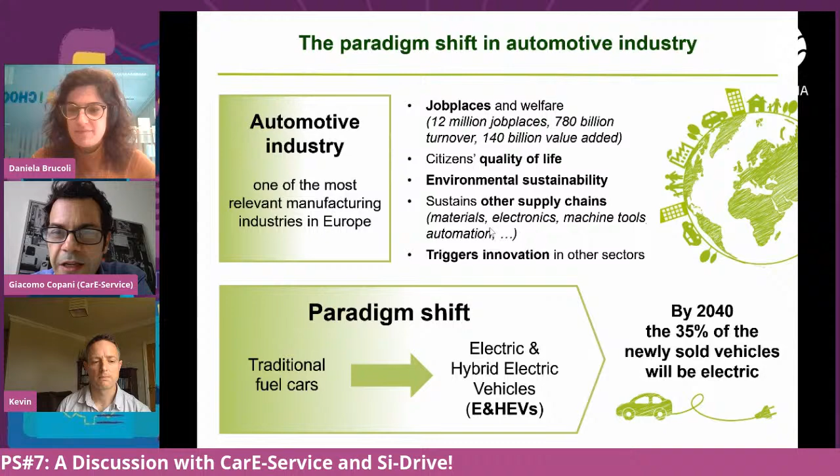So what is the point of CarE-Service? The point is the paradigm shift from traditional cars to electric mobility. We all know the projections. We all know that in 2040, more than 35%, now the estimations changed, will be the share of electric vehicles, but there are problems and opportunities linked to this transition. Here we are picking up some of the points that we address in the project. First of all, electric vehicles still have a high total cost of ownership, mainly due to the batteries.

So in CarE-Service, we are somehow addressing the 3 points. Obviously, the main one is the end of life, but thanks to circular economy, we also can improve users' experience and reduce total cost of ownership of electric vehicles. This is the project philosophy. So let's start digging into the topic.

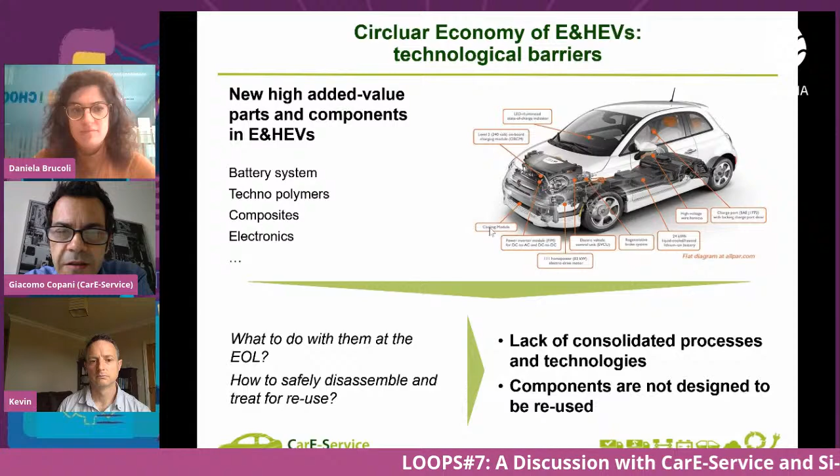Why this situation? Why are we not prepared for the end-of-life management of electric vehicles? Because they are basically a new product. They are new vehicles. And not all their components were designed for reuse, remanufacturing, or recycling. So really, there is a lack of knowledge, there is a lack of consolidated processes and technologies to reuse, recycle, and remanufacture parts of electric vehicles. And also, as I already mentioned, the design issue is quite relevant. Components are not designed to be reused, or they are not always designed in a structured way to be reused.

That's the point. So, in CarE-Service, we have the idea to work on the one hand on new technologies and business models to enable the growth of reuse value chains. And on the other hand, we have the idea to innovate mobility services based on the new reuse value chains. The two aspects are interconnected into a new ecosystem of mobility products, producers and users.

About the technologies, what are the main points of our project? We are working on the redesign for circular economy. We are working on the technologies per se, so technologies for disassembly, technology for remanufacturing, technologies for recycling, because in Europe we have a leadership in production technology, so we could, let me say, easily gain the same leadership in circular economy technologies. We are working on the business models to reduce the total cost of ownership of electric vehicles, as well as to enable new reverse logistics chains and new reuse chains.

From the mobility service point of view, the idea is to push new sharing integrated services thanks to the benefits that can be provided by circular economy. We are also working transversally on the regulatory framework, because we know that regulation is one of the major challenges for circular economy. So our project is also transferring guidelines and opinions to the policymakers as a European project. This is the underlying scheme that we are following in the project, and I would like to drive you through this.

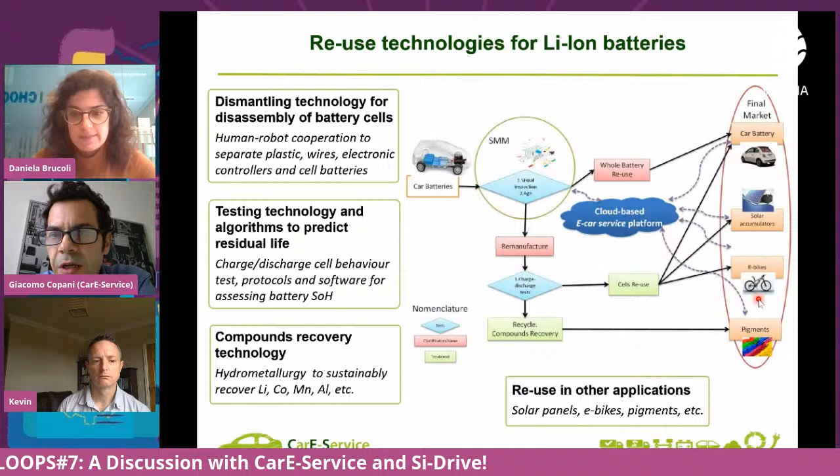And we are also working on the application side. In particular, we have demonstration scenarios in the energy sector, solar panels, automotive, chemical, but also in the medical field. I will tell you something later on. This is on the battery side.

What are we doing for the metals? For the metals, we are working on technologies for reforming metals and for disassembly of structural parts of metals. Reforming means taking a metal sheet which is used and giving it a new shape for a second use, more or less. Okay. So imagine that in the future, it can be technically possible to extract a roof of an old car and, for example, remanufacture a hood for a new car or as a spare, which gives a lot of flexibility.

The problem of structural parts, which are the red ones you can see now here, is that at the moment they are soldered, so it is not possible to extract modular parts in order to rebuild new structural parts for new cars. So what we are doing is to develop new desoldering methods and new modular joining techniques in order to modularly reuse these parts to make new components for new cars or fleets, new cars produced by OEMs, or spares.

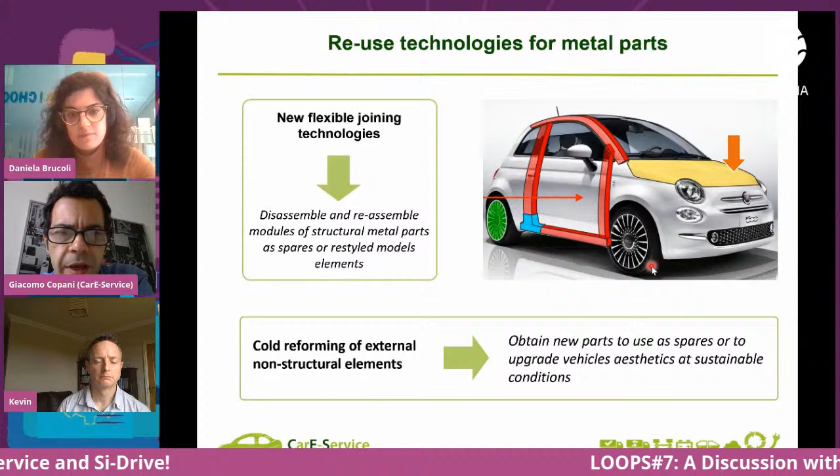For the technopolymers, we are working at the materials recycling level. So the idea is to select some valuable technopolymeric parts of cars and develop new compounds in order to reuse the material that we can extract from that, to be reused in new automotive parts as well as in new polymeric parts for other applications. So we are here talking about separation of metal and non-metal parts, grinding, formulation of new compounds, extrusion, and testing.

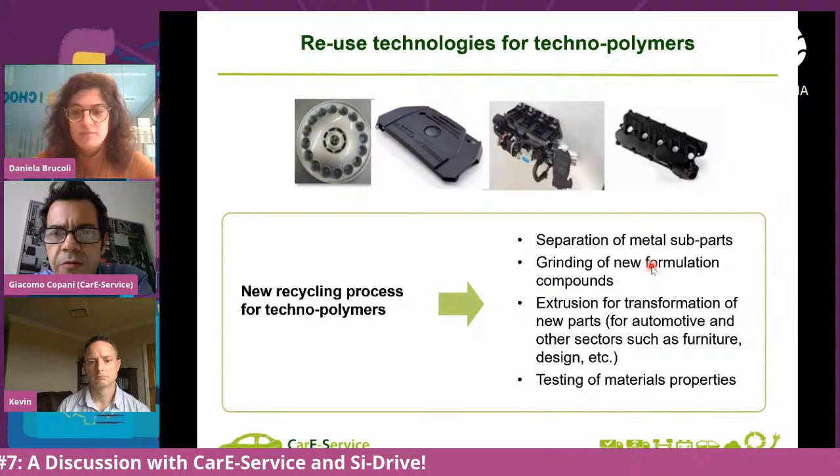Another very important part of our project is that we will enable the business of the reuse value chain through an ICT platform. Very important. This ICT platform will build a sort of orchestrated place where all the actors of the reuse chain can cooperate, but will also serve as a marketplace for the professional exchange of reusable parts. Reusable means remanufactured, recycled, and so on. So the platform is a trusted environment where you can find tested and certified parts.

You can put your needs, and then the supply chain activates based on the available volumes of cars and intermediate parts to provide what is needed. So in a certain sense, it's market pull. Another important thing is that the platform is linked with the mobile modules, because the parts that are certified locally by the mobile module will be made available immediately inside the ICT platform, and also the disassembly operation will be visible in the platform. The users can book the services of the module as a service of the platform per se.

Finally, about mobility services, we are designing with our partner car sharing services which are performance oriented, which are a little bit innovative in car sharing. For example, we are thinking about car sharing in rural areas, integration of urban and non-urban car sharing, integration of usage among companies and citizens, this type of things.

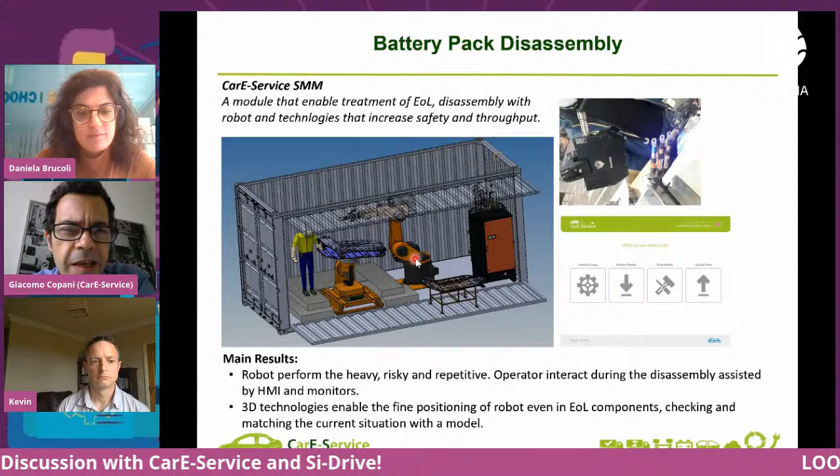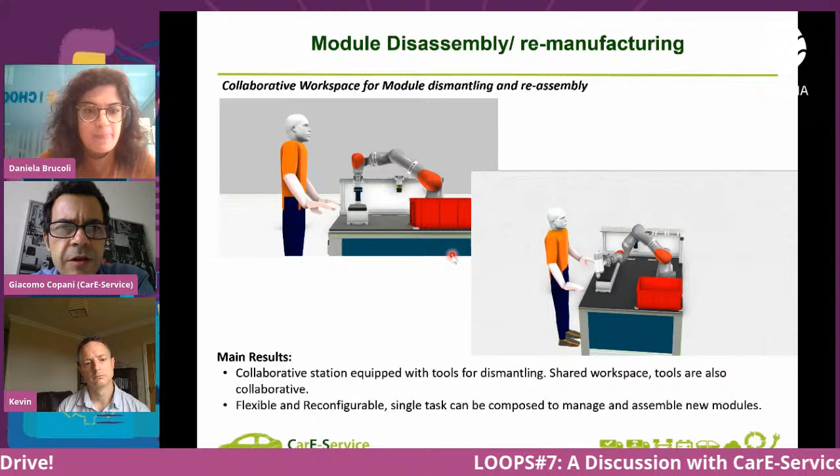A few words about the mobile disassembly system for battery packs. This is what will be included inside the truck: a robot for the disassembly of modules from battery packs in a cooperative environment, very efficient, and especially in a safe environment. For the disassembly of battery cells from modules, we are developing collaborative solutions. You see man-machine interaction, because here the operations are on a smaller scale, and still the goal is to guarantee safety, ergonomics, as well as efficiency of this operation.

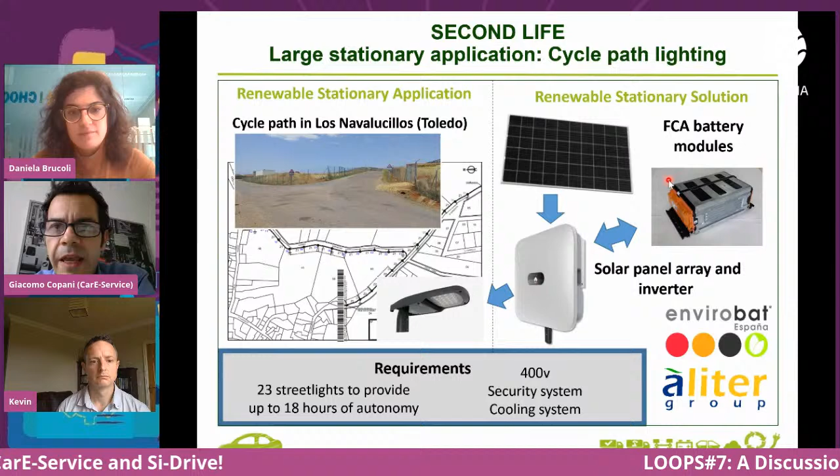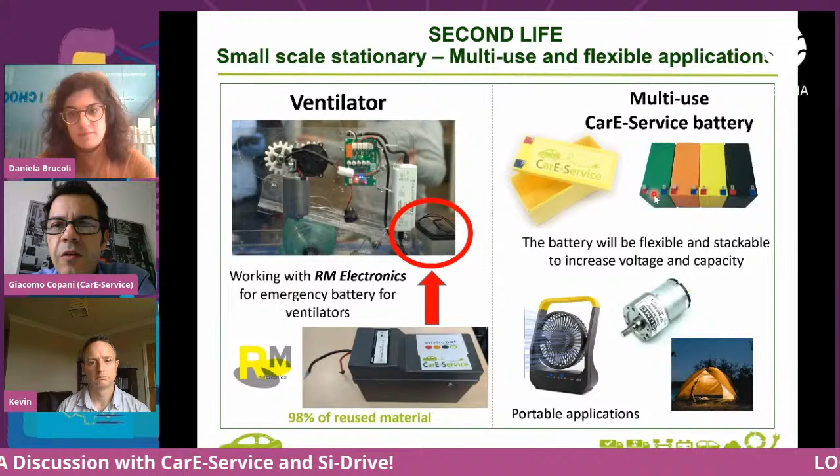The reuse applications we are working on are in the energy sector, so we are applying reused cells and modules into stationary applications, lighting systems for example, and renewable stationary solutions in solar panels. But we are also equipping remanufactured batteries into mechanical ventilators. This is one application that we developed to address the COVID issues with some medical companies. We are also developing a general concept of modular batteries, for example for portable applications.

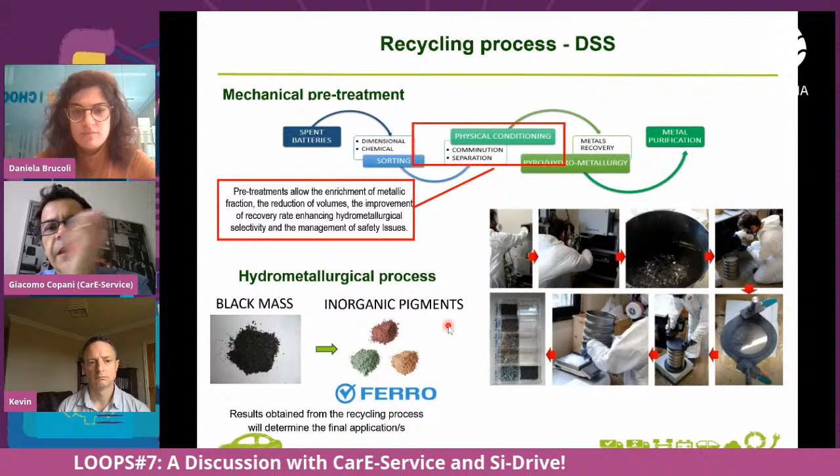For the mechanical pretreatment, as I told you, we are extracting black mass and inorganic pigments, not only for mechanical pretreatment, but in general for recycling. So we're mixing mechanical pretreatments and hydrometallurgy. For the regulations, we have already provided very precise guidelines and suggestions for the new regulation to the European Commission. This is a public deliverable you can download from our website if you're interested, as well as the other public deliverables. So please take a look.

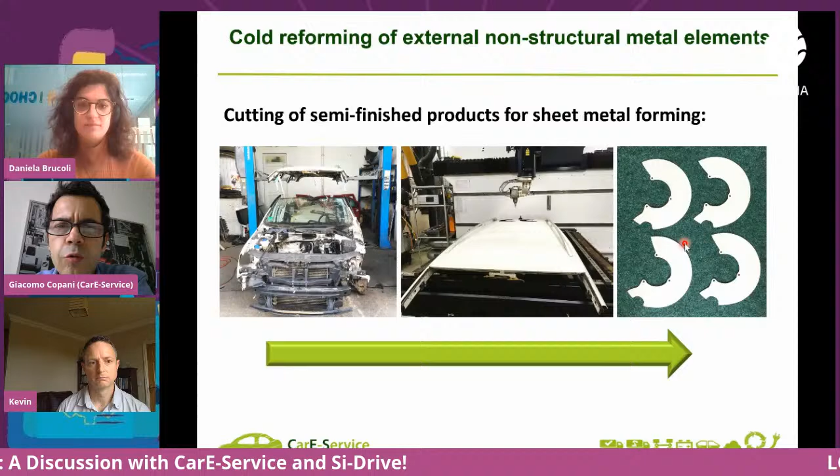For the technical parts, we are working in a scenario where you cut the roof of a car, and we realize parts such as disc brake covers for new vehicles or as spare parts through reforming techniques. This is just an image of the new laser desoldering techniques that we are developing to dismantle structural parts of vehicles in order to build new structural parts.

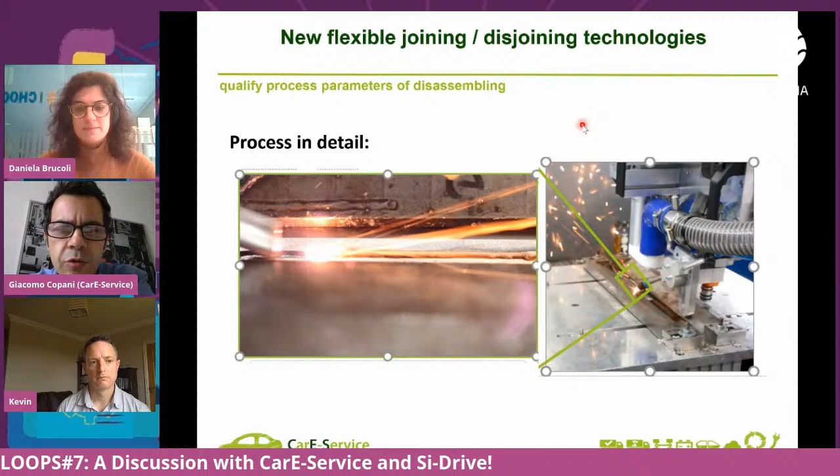For new cars, we are also working, of course, on the business models, because imagine, just as an example, if you can reform new metal parts, then you can also offer concepts such as a design upgrade of old vehicles. So OEMs, or maybe car sharing fleets, can have an upgrade of their vehicles, both in the aesthetics through new remanufactured parts, as well as in the functionalities if we want to provide new remanufactured electronics or mechatronics. These are the business models that are called remanufacturing with upgrades.

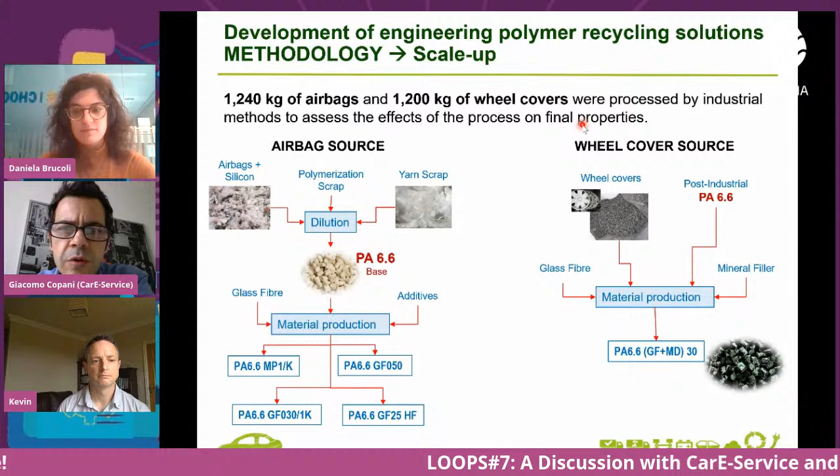Let me close just with this. We are in the final phase of the project, so we have organized a calendar of a number of events from now until November. They are training events on all the aspects which I told you, events that are meant to present information about the state of the art of these concepts, of these technologies, and so on. So very interesting also from a cultural point of view.

But especially they are also demonstration events where we demonstrate in practice the behavior of all the results applied to new scenarios. Of course, basically they are all virtual, but we are also studying the possibility to organize some physical event if it will be possible, especially after summer.

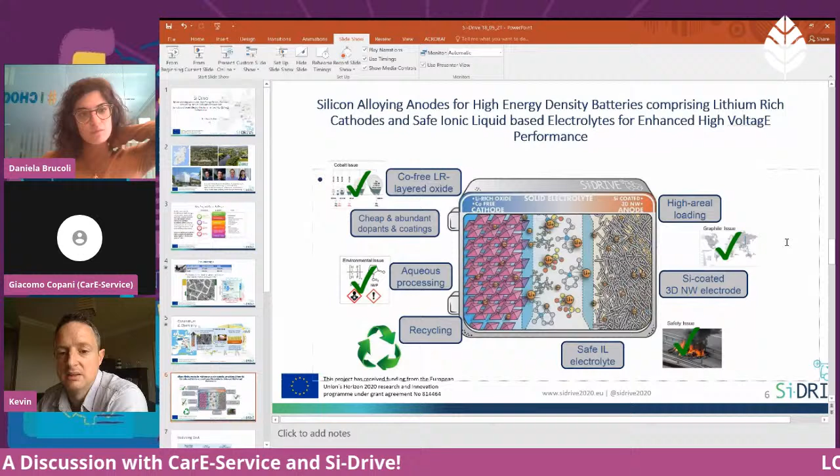The ionic liquid electrolyte is a lot safer than the organic electrolyte. So in the event of a crash where you get a piercing of your battery cells, the flash point for thermal runaway is significantly higher than it is for the organic solvent. So it's a much safer chemistry for use in electric vehicles. And as I said, with the silicon nanowire coated 3D electrode, we're eliminating the binder and conductive additives, but we're also eliminating graphite. And there are major issues with graphite in terms of supply chain in Europe.

The cathode is reduced in cost because of the elimination of cobalt, and the electrolyte goes up in relative cost because of the ionic liquids. But in terms of the total chemistry, we have outlined pathways to achieve this target.